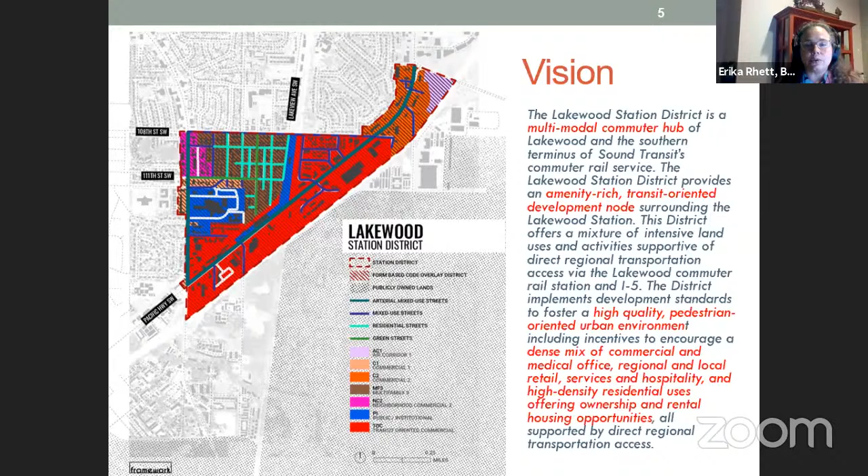So let me go to the next slide. The first top concept I want to talk about is transit-oriented development. This is the main thrust of the land use arrangement for the station district. It takes advantage of proximity to transit.

In the concept map here, you can see what's shown in this concept map in the bold background colors are the underlying zoning. For the most part, we didn't make any major changes to the underlying zoning in terms of where it's applied within the district. In that brown area, which is MF3, we're really looking at about 40 units per acre for residential development. And then in the red area, which is the transit-oriented commercial, we're looking at 54 units per acre oriented around mixed-use development. But in other commercial areas, we would also be looking for opportunities to support live-work development.

And of course, continued support for employment and business uses that exist within the corridor, and then also encouraging new employment and business uses in the corridor as well.

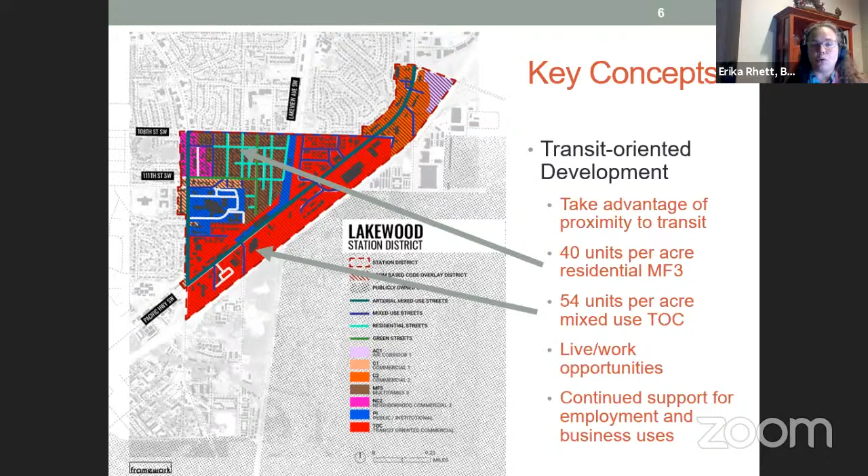So one of the things about the land use plan is, just a little bit about this presentation: I'm going to provide some key concepts, and then we'll talk a little bit about some of the information that is part of the planned action as well.

And so here in the land use, it's important to realize that the densities we have identified for these areas are within the ranges that were identified in the comprehensive plan overall. The land use plan includes the zoning that I just identified previously.

It also includes some capacity built in for the development of the Lakewood Landing project, which is part of the sub-area and on a similar development track with the overall development of the sub-area. But because it's a master plan, it's developing a bit on its own track as well.

So in terms of land use, we predict that the area has a residential capacity for about 1,172 dwellings and an employment capacity of about 1,276 jobs. So those capacities are ranges that we plan for within the planned action.

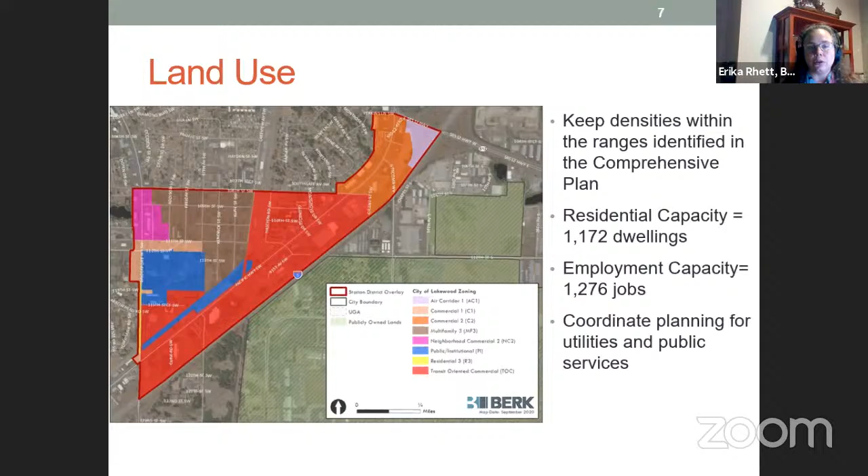So I'm going to pause now and give the opportunity for people to ask questions. Also, just a couple of points of discussion: how sound do you think this approach is to transit-oriented land use in the plan? And are there additional measures that might support economic development? These are two questions we are interested in discussing. I'll pause now and turn it over to the chair.

Thank you as well, Erika. Is there anyone on the call from the public that would like to comment or have any questions for our presenters?

And I think there's several ways they can identify themselves. I think they can raise their hand and they can also enter a comment in the Q&A box. Yeah, I can't... I don't see any comments on the Q&A myself.

Is Connie, did you have a question? Yeah, I was just wondering if the commissioners could ask questions also. You asked. Yes, absolutely, go ahead. So when you were talking about the mixed use, do we know what that looks like? I mean, what is the mixed use?

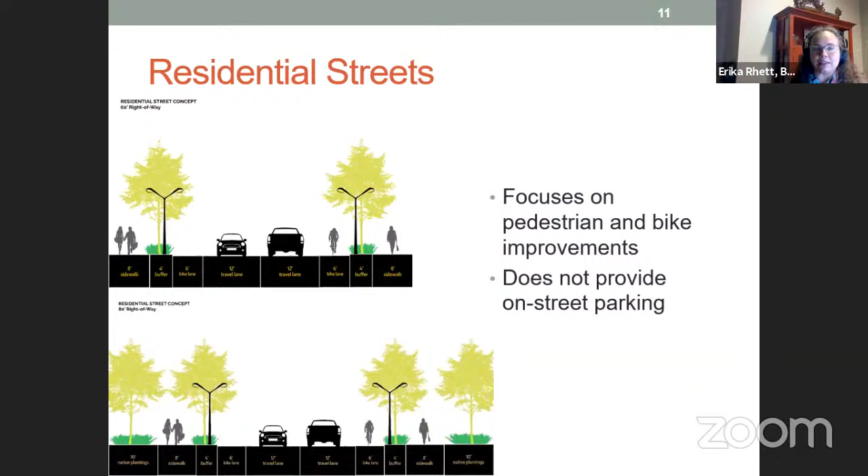It also provides landscaping and greenery to enhance the feeling of the public open space. In addition to residential streets, there's a few identified green streets on our concept map. That would include Kendrick Street, which leads on the back side of the railroad tracks to the overpass, as someone was speaking to before. Also 111th and 112th, where the city has already invested in some pedestrian improvements.

The idea with green streets is that, in addition to these functional features for pedestrian and bicycle movement, there would also be treatments that create a type of linear park along those areas. So it would provide both functional and amenity features and an opportunity perhaps for additional open space.

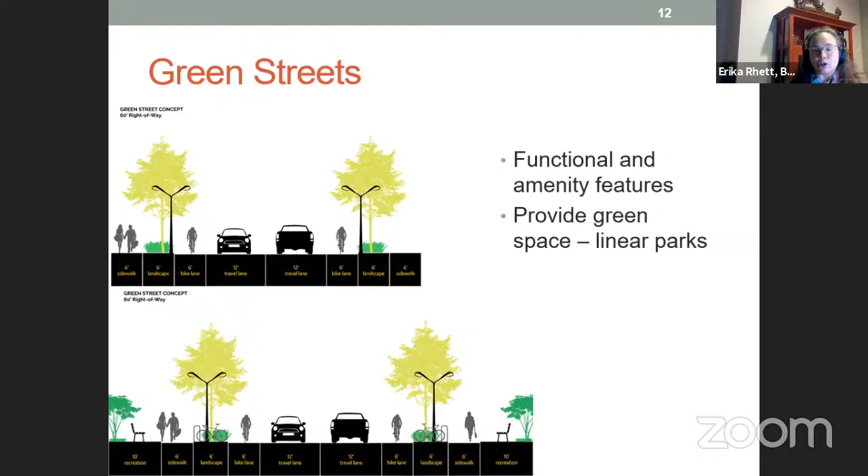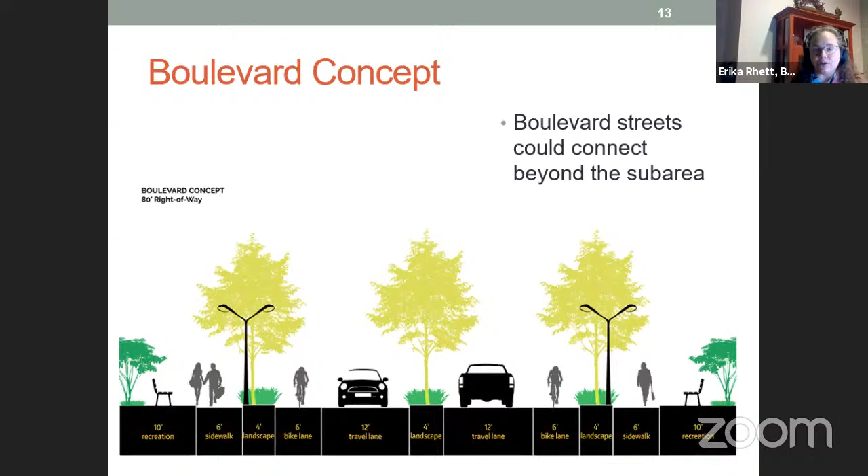Going one step beyond the green street is the idea of boulevard concept streets. These are streets that would connect beyond the sub-area. So we might consider boulevard streets that would connect between the sub-area and downtown, for example, providing a type of green streets treatment that would go even beyond the sub-area.

So I'm going to pause here so we can talk a little bit about the form-based code. We welcome your questions and comments about any subjects you're interested in, but a couple of items we highlighted for discussion were feedback on the approach to the hybrid form-based code, and thinking about streets that might be ideal for green streets or boulevard streets.

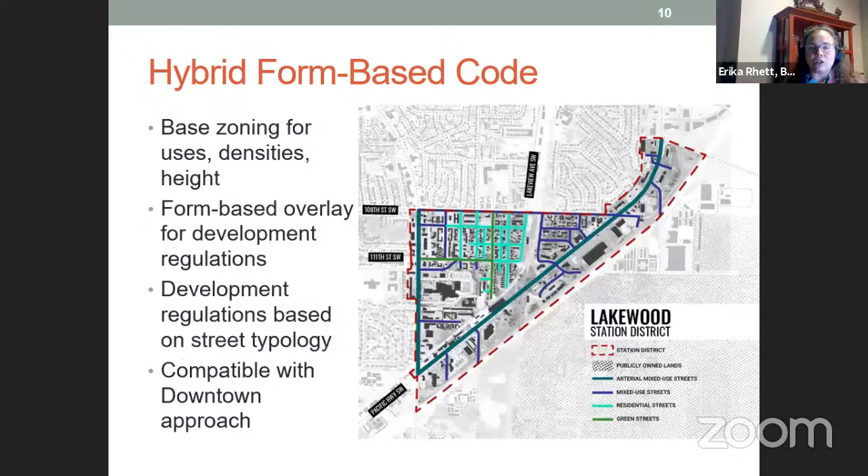To enhance that discussion, I'm going to go backwards in the presentation to this key concepts slide, which illustrates where we've identified the green streets, along Kendrick and along 111th. And then you can see the potential for residential streets in the MF3 area.

Great, so I'll open it up again to any questions or comments from the public. You can put it in chat or talk or whatever. I don't see any other questions there. Do fellow commissioners have a question yet or a comment? Okay, so we'll go with Mr. Pearson first.

With those different street types, does the city have the right of way for both of those? Do they have 80 feet of right of way in some of these areas where you're looking to put those, or would right of way be required along those corridors?

So in the concepts for green streets and residential streets, we recognize that there's variable right of way. We basically have a cross section that's meant to fit within the existing right of way, so there's some variation in the standard to accommodate the right of way that the city already has.

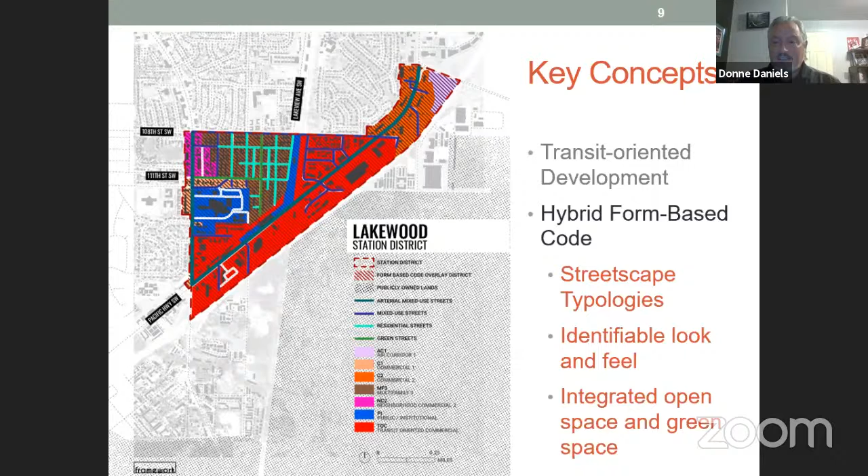Okay, any other questions? Don't see any others, and I don't see any questions from the public. So if not, you can continue on. Okay, I'm going to go back to where we were in the presentation here. I just wanted to loop back so we could take a look there.

I do see one question or comment here, just came in from Mike Brandstetter. You want to go ahead and read it and answer? Oh, sure. Could an extended Green Street or Boulevard Street reach out from the sub-area to Lakeview Hope Academy, where some open and public amenities exist, perhaps Kendrick or Klein? I think that's a great suggestion, and we can take that into the comments for consideration.

Yeah, great. It could be a really nice part of some of the connections that would extend beyond the sub-area and closer to downtown as well. And that was Mr. Brandstetter—I appreciate it, thank you Mike.

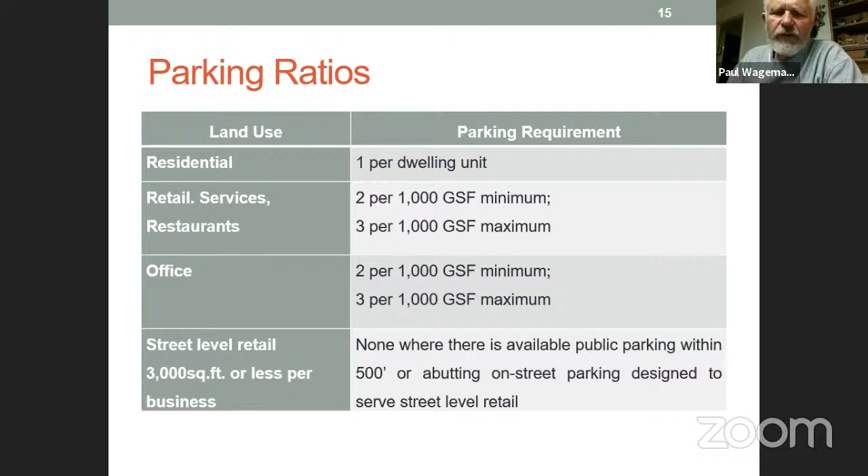Well, Brian's trying to get in too, but on this parking thing, to me, if you looked on the periphery of the area and looked at some areas where you could have like a satellite parking lot, but then going back to my comment on the last section, as you look at all these places in total, you want to maybe make a pathway or a roadway or a walkway to one of the other areas, and look at places along there where people could keep autos for a short period, and as those spaces aren't needed anymore, then it turns into development, or some kind of thing. So that's kind of what I was thinking.

Mr. Pearson, did you have a question? Yeah, kind of a comment to add on to yours. I generally agree with your comment. The parking numbers seem a little bit low for Lakewood. I get the idea, trying to reduce it and work towards an autoless kind of area, but I just don't see that happening as much.

If it ends up being a great place, I think what you would end up with is something similar to some of these areas in North Tacoma, where you actually get people driving, coming in there to go eat and to go to these different amenities and things. Kind of similar to what happens up there is parking's a nightmare and you can't even find any parking, and then you have people parking down streets. Maybe that's something where you could add in, like, a third street section that does include some street parking on some of these side streets, not the main streets, but maybe some of these side streets could accommodate some more residential parking. So I do think the parking numbers are a bit low for Lakewood, given the area.

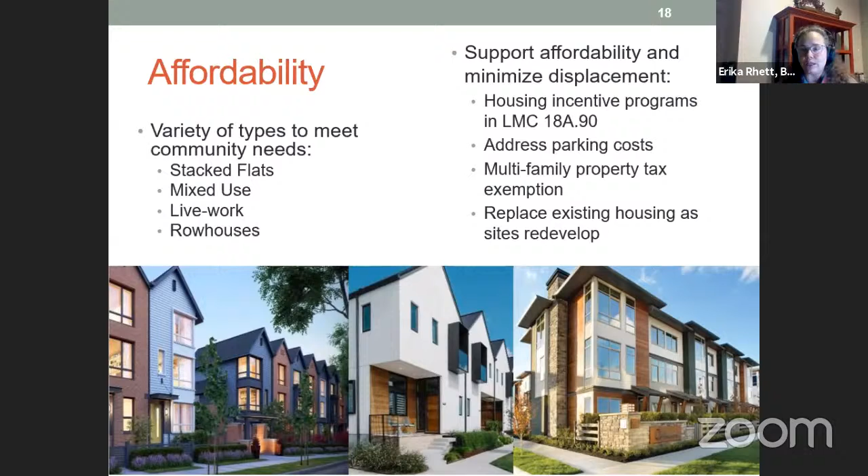We're possibly looking at extension of the multifamily property tax exemption. And I already addressed this last point about replacing existing housing as sites redevelop. So the goal is to maintain the area as an affordable place and allow opportunities for people with low and moderate incomes to continue living in the sub-area.

So I'll pause here for a bit of discussion, and we'd love your feedback on this approach to housing affordability and any other approaches you think should be considered.

Mr. Wagemann? Well, I've doorbelled a lot of spots in the 28th district, which goes all the way down to Roy. And you get a lot of people out in the Graham area, and the reason they like it out there is because it's affordable. But what they don't like is there are no buses out there, none of those kind of things. So I think having clusters of these kinds of places in our community is a really good idea and a good concept.

My mother's an Australian. I was born in Australia, and they're very rural, but as people get older, they can't get around as well, so living in rural areas doesn't work. So what they've done is put lots of senior places clustered like this. So what we have is people going to Seattle, living down here and working out of Seattle for one of the big companies. So trying to meet all those needs, I think, is the right thing to do.

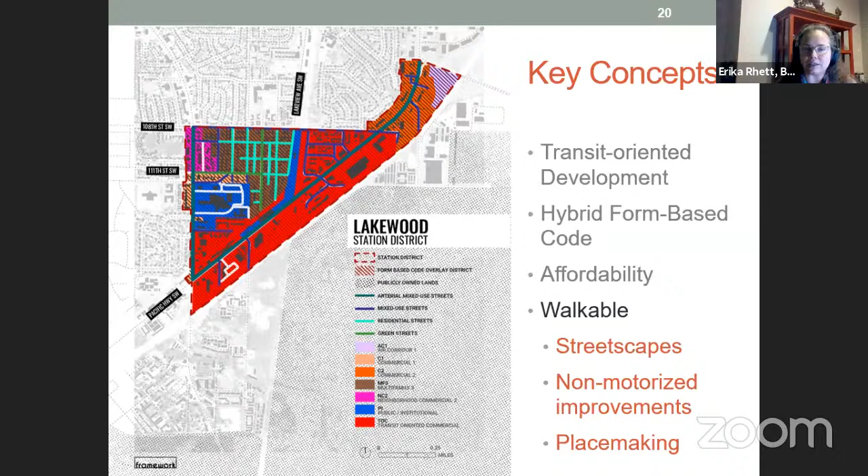Okay, so the next thing we're going to talk about is the type of transportation improvements I alluded to before in response to some of the comments Mr. Guerrero made. One of the key concepts is creating this area as a walkable area. One of the things we do to support walkability are the streetscape approach I talked about in the urban design section, but also a series of non-motorized improvements geared around connecting people to and from the transit station and major areas within the study area, and also creating places that you want to walk to, getting that land use snowball going where you have places people want to go and walk within the study area.

In terms of transportation improvements, a number of improvements are already proposed, including some pedestrian and bicycle improvements identified to go in around the station, some signal timing improvements to improve the flow of traffic in the area. Sound Transit has a system access fund identified for pedestrian and bicycle improvements to provide access to and from the station. And the Pierce Transit Destination 2040 has two planned bus rapid transit improvements: one would add a new route to and from downtown Tacoma, and the other would put a bus rapid transit route in place of an existing regular bus route that would connect between this area and Puyallup South Hill. So a variety of transportation improvements are already on the books that will help create and reinforce this area as a transportation hub and make it easier to get to and from the transit facilities for the station district.

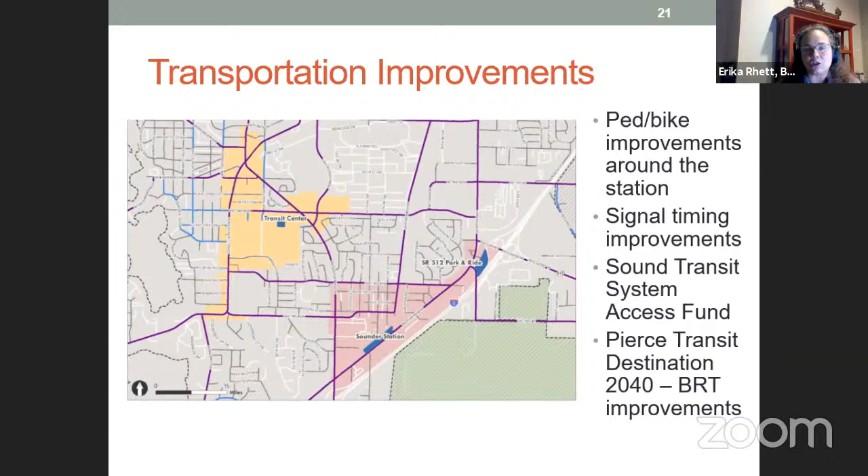We also took a look in terms of mitigation. So we've looked at the proposed growth in employment and residential capacity in the area, ran the transportation model. This was work that Fehr and Peers, a transportation consulting firm, did working with us in the city. We took a look at the growth numbers and also where the growth is proposed to go within the sub area, and looked at how the area is performing now.

What would happen at full build out, which is the alternative one, and then what would happen if there was full build out and we added a few mitigation measures.

So there were three identified intersections: Pacific Highway and Halcyon Road, shown here as this orange dot, and then two others, Pacific Highway and Bridgeport Way, and Bridgeport Way and the southbound I-5 ramp. You can see those dots down here on Bridgeport.

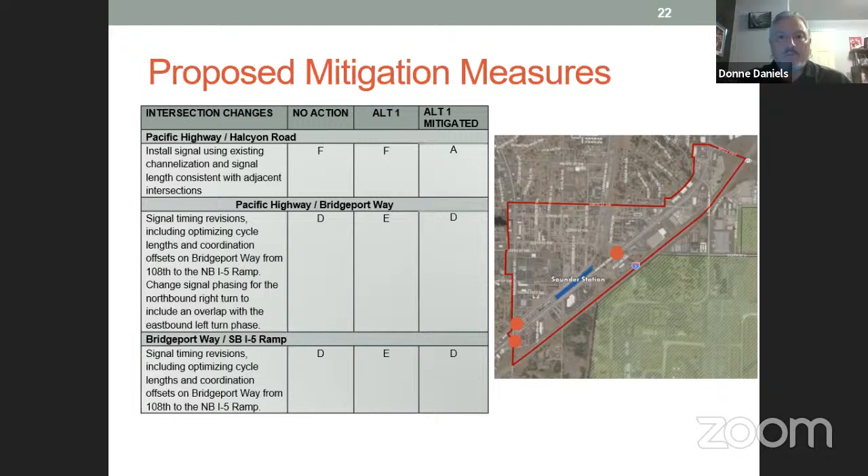Okay, seeing none, or hearing any other follow-up questions, does this end your presentation then, Erika? And is that what you're saying? I just have a little bit of a next step slide if the comments and questions are complete. Yes, I believe they are at this time. I don't see any other questions from fellow commissioners or the public.

So go ahead. Well, first of all, thank you so much to those members of the public who are observing and who asked some questions and made some comments, as well as to the Planning Commission for your really thoughtful questions and discussion. I think it was really great for the advancement of the plan.

We're right here at fall 2020 with a draft sub-area plan and planned action. We'll be moving through a review of the plan and the planned action, including both of these things and the hybrid form-based code as well. The three documents are really the three legs of the stool for the plan.

So we'll be moving through there and then on into a final sub-area plan after the first of the year. So we're really right in the middle of this process, and we're looking forward to comments that we may receive at the public hearing so we can continue to make improvements.